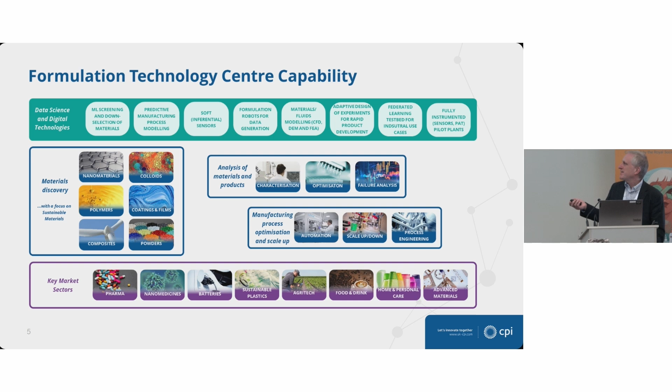Again, part of the work's already been done for me today in terms of describing what the problem is. This actually is the shampoo that I used this morning to wash my hair. I've turned up here with clean hair, you'll be pleased to know, and there's about 20 ingredients there. So one of the problems when you're formulating or reformulating is you've got combinatorial complexity to deal with. You've got multiple ingredients, potentially at multiple levels, and some of those things don't like each other.

A former director of formulation used to talk about synergistic effects in formulation, which is what you want to achieve, but sometimes you also have antagonistic effects. Things don't want to be together. You have instability issues. And you can also have competing requirements, competing critical quality attributes and critical process parameters.

A very simple example that's familiar to everybody: if you are painting, when you apply the paint to the wall, you want that paint to have a low viscosity. You don't want to be forcing the paint onto the wall. Once it's on the wall, you want the paint to have a high viscosity, so that it doesn't sag down under the action of gravity. So you've got two different viscosities under two different shear regimes. Those are two competing things.

Now, the paint industry solved this years ago, so much so that we don't even notice it anymore. But that's one example of these competing issues. And as has also been mentioned today, scale up can be an issue as well. You get a formulation on your bench, it works wonderfully, you try and scale it up, it all falls apart, it's horrible and you can't manufacture it. So scale up is an issue as well.

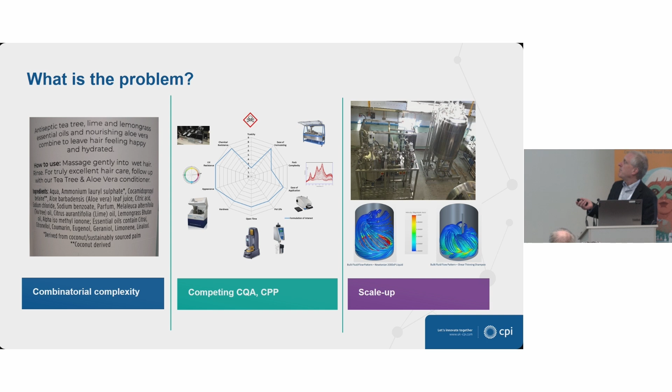Now, I wouldn't have mentioned those three problems if I didn't think that CPI could help people and offer solutions to these things. So in terms of attacking the combinatorial complexity and these competing issues, we have a suite of laboratory automation that's available, and all these things, as I say, are essentially open access.

That's backed up and supported by some techniques around data analytics and machine learning that I'll talk about, and then also hopefully I'll have time to talk about tools for process scale-up, because I think, I've just gone blank on the gentleman's name, Peter, I think Peter Clark from IUK, he mentioned about access to scale-up being an issue.

Hi, give us a ring. Okay, we have scale-up facilities. We can take you from 1 mil, sub 1 mil, up to, I forget, at least 1,000 litres, probably bigger. Okay, 1,000 litres certainly at Sedgefield, and with some of our sister sites around CPI, probably even greater scales. So we have scale-up facilities.

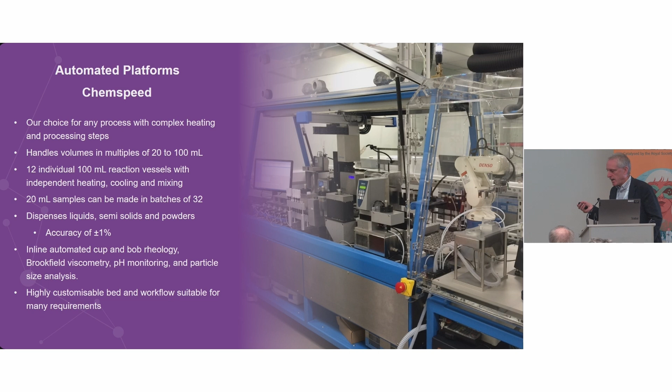Okay, so just a quick breeze, an introduction to 3 of our automation platforms. The first one was built to our design by a company called Chemspeed. You've actually seen a similar one of these already, if the design looks familiar, because the MIF have some of these systems as well. They're great systems. They can handle a very wide range of materials, viscous liquids, mobile liquids, pastes, semi-solids, powders. Essentially, if it's feasible to dispense it, other than sticking a spoon into a jar, then these systems can handle it. It's a very nice variety of mixing systems.

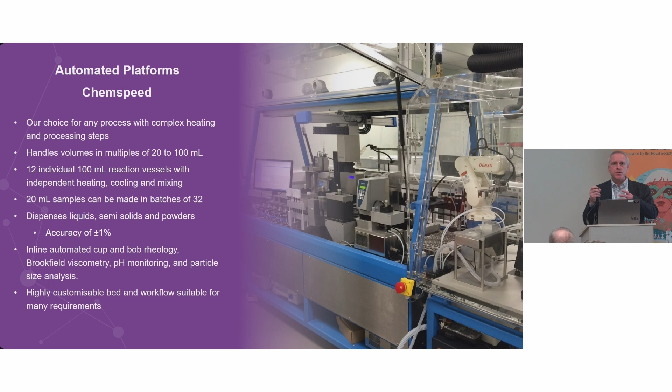And the nice thing, and the thing that we worked with Chemspeed to do to get the customization on this, is that we've got at-line viscosity and rheology measurement. The rheometer is actually just sitting off here. That's the little arm that serves the rheometer. So you can actually look at the rheology profile of a material as it's made or as it ages. Because we thought that rheology is such an important property in formulation manufacture, we wanted to make the effort to do that. And we have some other, say pH monitoring, also particle size analysis.

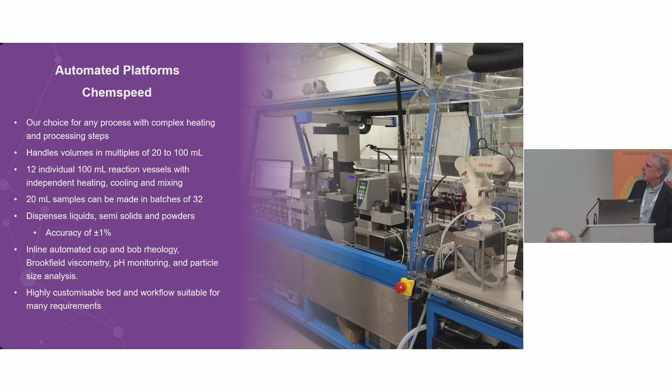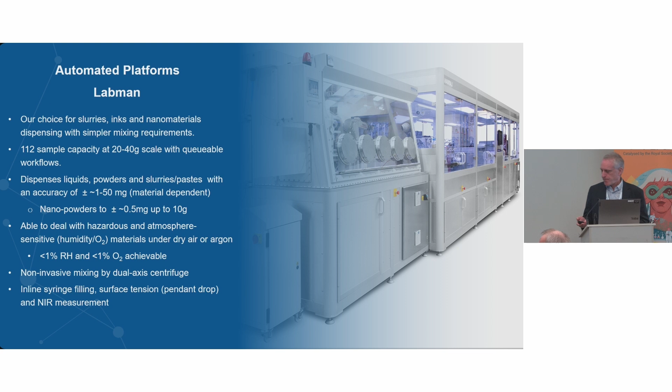It's a multi-axis arm, essentially on a mobile platform. And a lot of the cleverness is in the mobile platform that has lots of sensors so that it detects if there's a person or other object nearby and will stop. And also you teach it a map of the environment that it's going to operate in. We've got one of these now operating in the lab, and I think this is a major revolution in automation. I think it will bring automation into a lot more environments.

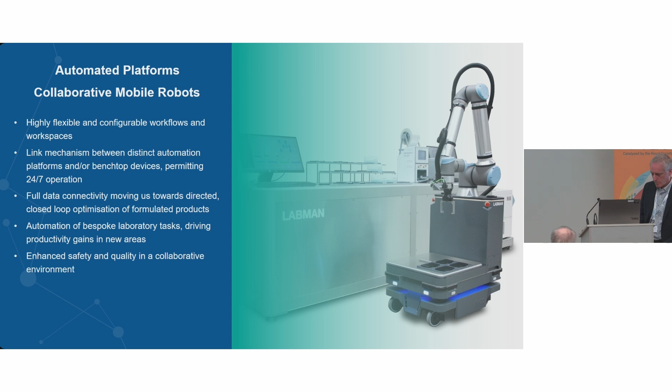Okay, not a terribly exciting or novel technique, but something I want to mention now because it provides context for something else I'm going to talk about in a moment. Design of experiment, it's a natural thing that goes with automation. So the ability to essentially think about and create an optimized set of experiments that covers a parameter space.

Really useful way, as I say, a natural way for automation to operate. It's generally regarded that it does reduce experimental time when you're covering a sort of a parameter space rather than trying to just vary one factor at a time.

Does have its limitations though, when you're faced with complex formulation challenges. So I mentioned my shampoo, which has about 20 ingredients, I think, depending on how you count them. When you've got that, and you can imagine trying to reformulate that at maybe multiple levels, you start to do the combinatorial, and it starts to become a lot of experiments.

If you're doing that with difficult materials, so each individual experiment does actually take a long time, then it actually becomes slightly unfeasible to do, and design of experiment really just starts to struggle. And even with automated facilities, the reformulation problem gets difficult. So just going to give a couple of examples of things that are trying to address that.

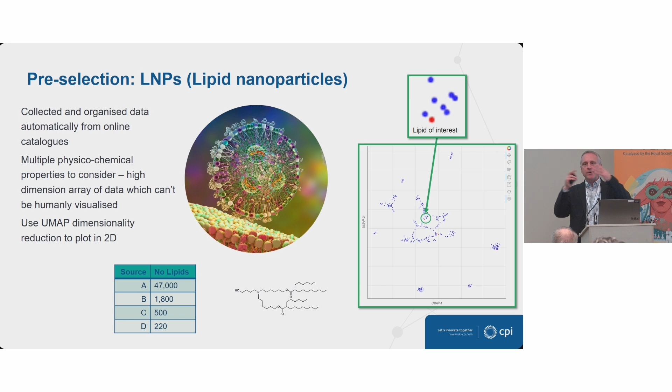You can do the same thing. Doesn't have to be just with solvents. This is actually with lipids, choosing lipids for lipid nanoparticles. So lipid nanoparticles, really important, used as a way of transporting RNA. At least one of the COVID vaccines was based on lipid nanoparticles.

But a real difficult formulation problem because they're made up of 4 different types of lipids. And if you look in the publicly available lipid catalogues, there are thousands, tens of thousands of lipids to choose from. So how do you choose which lipids? So again, we've used these dimensionality reduction techniques to find lipids that are similar to each other, and then if people just want to explore that space, they can do, or if they want to find things that are looking a bit different, they can do that.

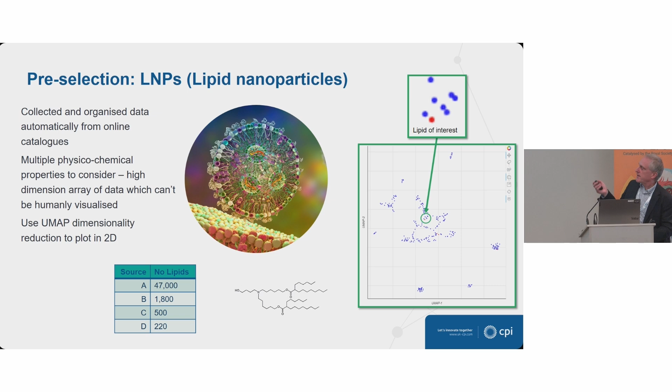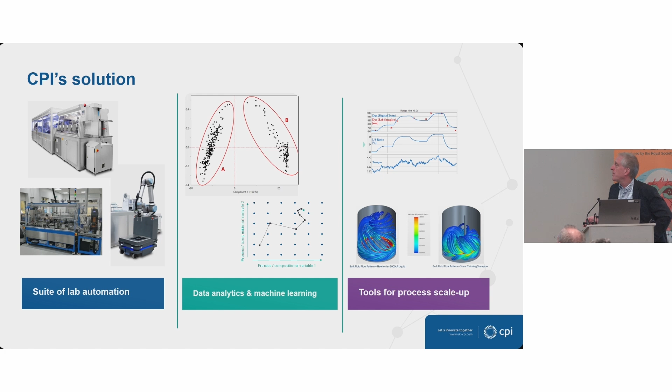Okay, so I've talked about the lab automation and the data analytics machine learning techniques, and I've managed to talk sufficiently quickly that I've got 4 minutes left according to my timer, so that's good. So I've got a bit of time just to talk to you about tools for process scale up. As was mentioned earlier, is there public access to scale up facilities? And I'd say yes, the answer is yes. It certainly is at CPI.

I'm actually going to start back with the robots, funnily enough. So in one end of the ChemSpeed robot that I talked about right at the start, there are these things that are rather prosaically called formulation vessels. I really wish they'd thought of a better name, but they do what they say on the tin. They're essentially miniature stirred tanks, stirring from the bottom in this case, about 100 mils volume, and you can formulate in those, and that's great. But then, how do you go from 100 mils to 1 to 10 to 100 to 1,000 liters?

And so one of the ways that we've tackled this is by using CFD modeling. We have a CFD modeling capability at CPI. So using CFD modeling to understand the mixing in these and in our larger tank systems. And one of the key bits of learning is by understanding the mixing at larger scales, we can use this to constrain the mixing at smaller scales. Because it's dead easy on a bench just to turn the wick up on your stirrer and have a little stirrer bar going faster. But that might be creating an environment that you can't replicate in your 1,000-litre tank. So that's one of the many learnings from this.

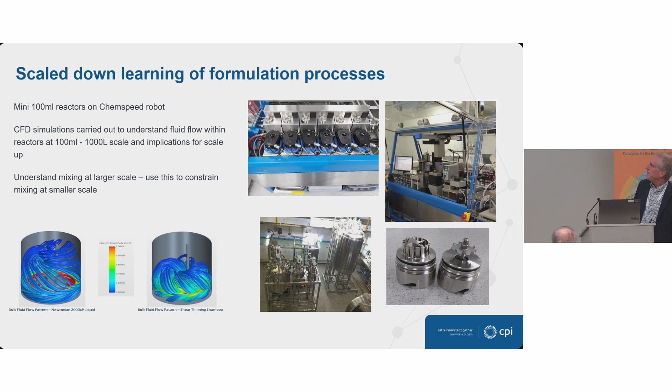One of the other areas that we've been looking at, and we've run a number of projects on, is this area of soft sensors. Now, I'm not sure I can say that soft sensors were invented in the Northeast, but they were certainly nurtured in the Northeast by Julian Morris and his group at the University of Newcastle. So what is a soft sensor?

Well, before I go into that, ideally, when you're running a process, whether you're scaling up or running a manufacturing process, you'd like to control on the critical quality attributes. So you'd like to say, I want to run this process to get my emulsion to a particle size of blah, or I want to aim for this viscosity level. But they're often only accessible by offline measurements or by implementing expensive PAT. PAT, for people not familiar with the acronym, is process analytical technology; it's basically taking research grade instruments and strapping them onto a manufacturing line.

But it's not always feasible to do that, either technically or commercially. I mean, it can be really expensive. Some of our pharma colleagues particularly tell me there's regulatory issues as well sometimes associated with that. So, okay, what's the alternative?

Well, the soft sensor approach: if you combine inputs from the sensors or the data you have already, then you can sometimes use this to infer something that you're really interested in. So, as an example, this data here is actually inferring viscosity from the pressure drop. I think the team had put a few kinks in a pipe and then measured the pressure drop along there, and the pressure drop relates directly to the viscosity of the material.

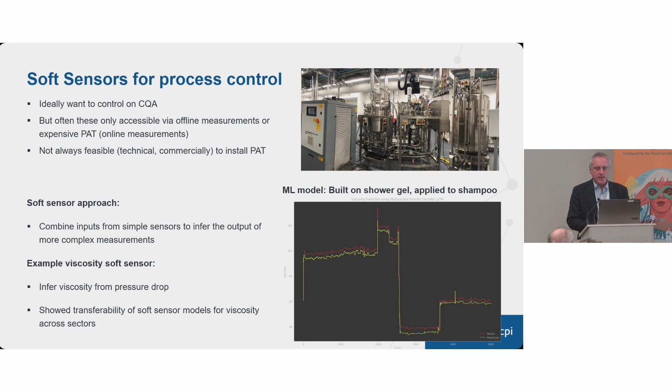So building these sort of soft sensors gives you access to much more information about your process than you might have already. And we've shown things like, for example, we used a shower gel to actually build the model, and then applied it to shampoo. So it's transferable between systems.

The final thing I want to talk about, and actually I think, Andrew, you mentioned right at the start of the day, if people can remember back that far, is the need for maximizing manufacturing efficiency. And one of the techniques that's been developed, and again, we worked with this company, Perceptive Engineering, to help introduce this technique into the chemical-using and formulating industry, is model predictive control.

Model predictive control takes that soft sensor idea I was just talking about a step further, where you essentially build a machine learning model that connects the things you can control in your system, which are often things like stirrer speed, circulation pump speed, and the things that you want to measure, so a particle size measure, viscosity.

There's no magic here, so you have to do a few tests or experiments to actually build the model first off. But once you have the model, you can sort of invert it and use it to control the system that you are operating. And it has been shown, and it's used now extensively in a number of industries, that this can operate plants in a much more efficient way, because you're automatically controlling for the things that you want to make. So you've got much lower risk of, for example, wasted material, wasted runs.

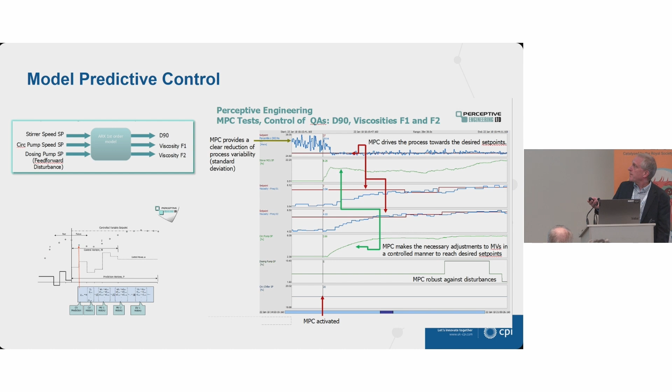So that's the final one of the techniques that I wanted to talk about. Right. I am slightly over time, so I'll stop talking in a moment. So just a quick conclusion. CPI, I hope I've shown you, has got a suite of tools based around lab automation, data analytics, machine learning, process monitoring, scale up. And the key thing, all of these tools are available today.

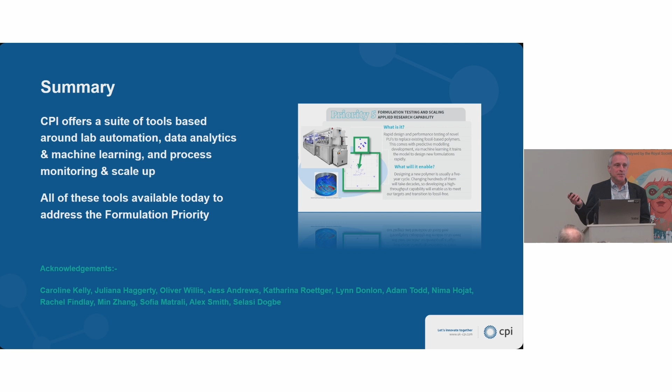Well, thank you very much. That was really informative on the capabilities that we have at our doorsteps in our national assets. Just one very short question: if somebody wanted to have access to your facility, do they go via you, or is there a system for how they can actually access that?

Well, yeah, by all means, just phone me. There's my phone number. The more useful answer to your question, though, is yes. We offer fee for service, so essentially a direct commercial contract. We also do a lot of CR&D work, so if you want to work with us to develop a proposal, then that's good as well.

If you're sitting there thinking, I'd really like to work with these people, I've just got no idea how I'm going to fund that, call us anyway, because we've got very clever people who really understand the funding landscape, who work with people like Peter Clark and others at IUK, and their counterparts over in the European Union with Horizon programs. So just give us a call.